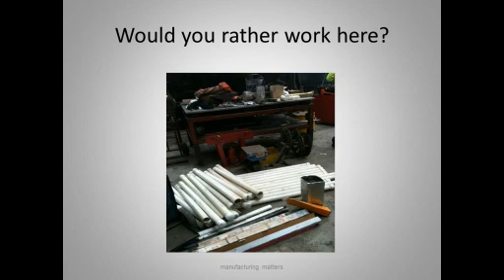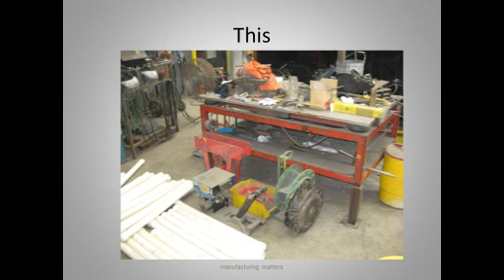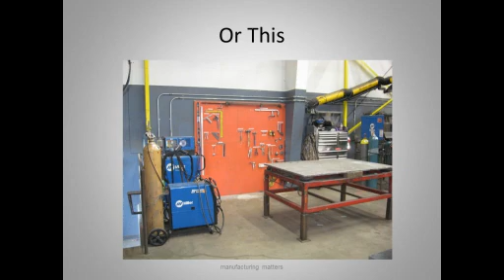So let's look at some quick photographs. Would you rather work in a place like this? Would you rather work here, or would you rather work here? And again, would you rather work this kind of spot, or would you rather work here? Now these pictures were all taken at Madden Fabrication here in Portland, and they're not suggested to be before and after pictures as much as they're pictures during the 5S event that we did there a few weeks ago, a couple of months ago.

By the way, the 5S stuff is not just about the shop floor. For those of you that have a nice cushy office, tend to think, well, this 5S and this lean stuff is all about organizing the shop floor, guys, it's got nothing to do with me. Not true. You're not off the hook. You can apply these techniques and 5S stuff to your office environment too, and we'll see how to do that.

Okay, let's look at some definitions of 5S, what it means. I've got a couple of definitions here. So 5S is a way of organizing the workplace so that everything has a place. Everything has a place. There's a place for everything, and the things are easy to understand. It's about things that are easy to understand, and that's where it leads into this visual stuff.

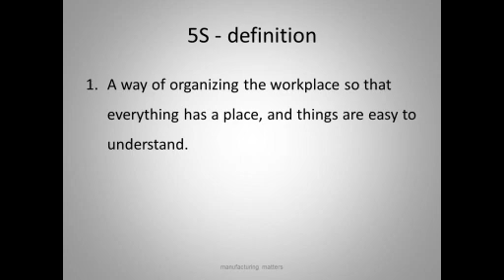Here's another definition: it lays the foundation for a visual, efficient workplace. So not only is it about workplace organization, but it also lays a foundation of these lean techniques. 5S is one of the fundamental foundational ones. You find that a lot of them build on 5S.

You can go as just use 5S and not do anything else if you wish. You could just do workplace organization and leave it at that, if you wish. But if you want to continue further, then 5S is a foundation, sort of a bit of a discipline that the other lean tools build on.

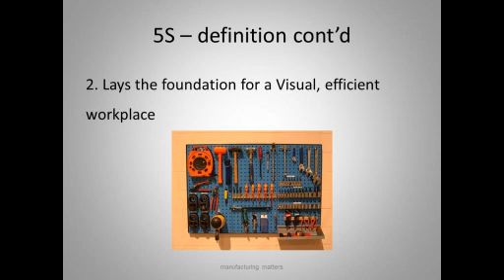Here's the easy definition, the only one you really need to remember: it's a place for everything and everything in its place, at its most fundamental form. That's the bumper sticker definition, and it's the way most of us were brought up as kids. You know, it's go clean your room, it looks like a pigsty.

The little whack on the head here is the second statement: you should be able to find anything within 5 seconds. Think about that. It's pretty obvious that if I've got a shadow board alongside my work area on the shop floor, I can put my most frequently used hand tools there.

But what if I'm in the office? What if somebody calls in and wants to know the progress of their job, and you can't say, well, Martha's on vacation or off sick today, but she might be in tomorrow, she'll get back with you then? You need to be able to find information within 5 seconds too.

So whether it's in a file cabinet or in a computer, those things can be organized in the same way, using the same kind of discipline and techniques.

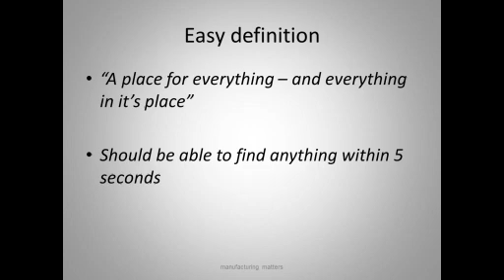What is 5S? It's actually in the lean world from 5 Japanese words you don't need to memorize, but they were translated into 5 English-American words: sort, set in place, shine, standardize, and sustain. We're going to go through each of those in detail.

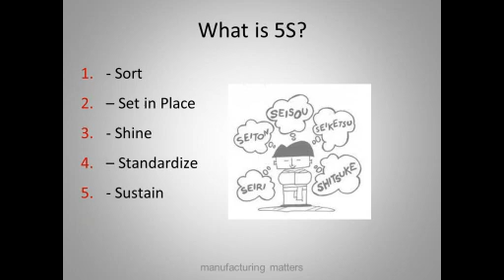Again, it's not just a linear thing where we go through those steps and we're done. Think of it as a philosophy of continuous improvement. We're never really finished. And the most difficult of these elements is the sustain part.

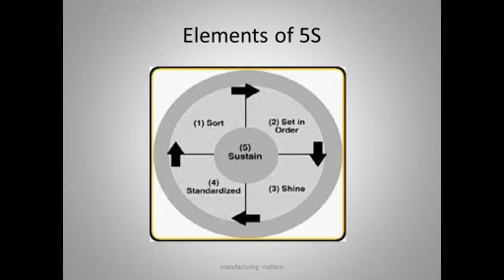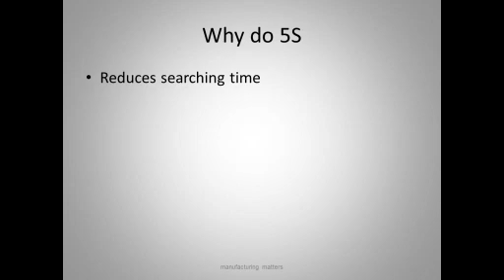Why do 5S? It reduces searching time. You're not going on search missions looking for tools, who's got my screwdriver, who's got my wrench. So it reduces searching time on the floor, reduces frustration.

It also enhances safety. A more organized and cleaner place is a safer place to work. You're not tripping over stuff.

Improves morale? Yeah, working in a messy shop is bad enough if it's your own mess. But if it's somebody else's, it's really demoralizing.

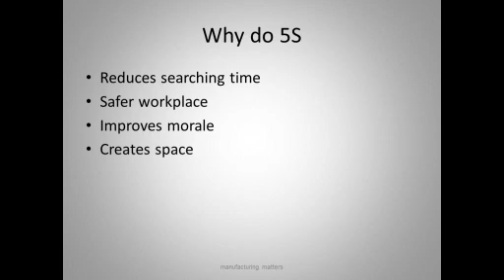Create space? Yes, I've worked with people in the past whose original reason for engagement was they wanted to move to a new facility, spend a couple million dollars because they were running out of space. When we looked at how they were using their space and did some 5S and improvements in process flow and layout, they had plenty of space. So it saved people some money there.

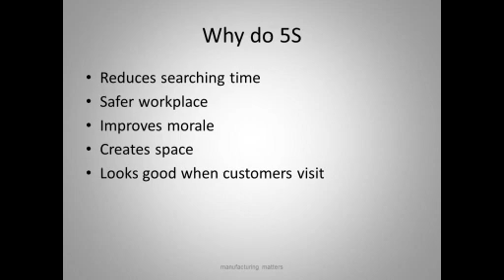And last but very much not least, it looks good when customers visit. You should feel proud of your shop, and when customers visit it can be a bit of a showplace. This place is well organized, these guys have got their act together, and I'm going to give them work based on that. And that happens.

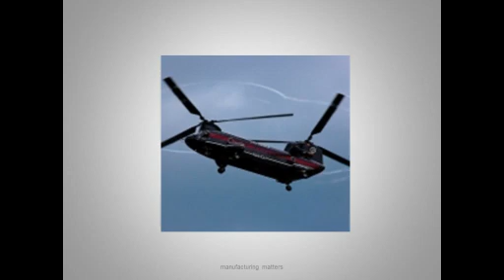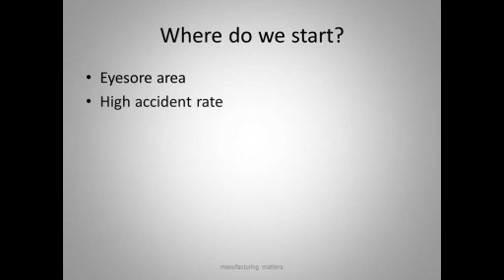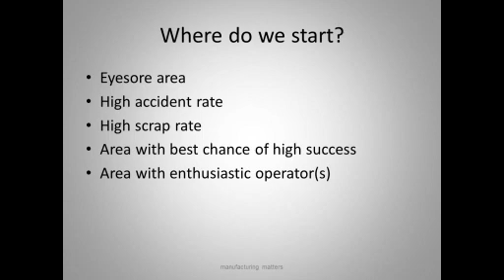So where do we start? Well, you can start with an eyesore area, the obvious eyesore area. I like to start with the two at the bottom here: pick an area, pick on some low-hanging fruit, pick an area with the best chance of success, and an area with enthusiastic operators. The operators, the people in that area, the shop floor guys, are the ones you'll be working with doing the actual 5S, and they need to be enthusiastic about it, otherwise it won't work.

So going through the elements of 5S in detail, the first one is sort. Define the area that we're going to 5S. We need to really delineate it, because we need to define what is in this area and what's not. Don't bite off too big a chunk at first, because you'll find this sort area might be more time consuming than you originally planned. Maybe you should tape it off, maybe put some chalk lines on the floor, but define exactly what's in this area and what isn't.

First thing we do is remove all the items from this area, and we put them into 3 piles. Basically, and this is fundamental, we put things into 3 piles. So we take all the stuff out of an area, put it into 3 piles on the floor.

There are things that we use every day. There are things we use occasionally or infrequently when we do that particular job for that particular client, like this fixture, this gauge, this particular tool. Then there's a third category: I've worked on this bench for 3 years, this stuff's been under my bench, I don't know what it is. That third category is stuff we basically don't use.

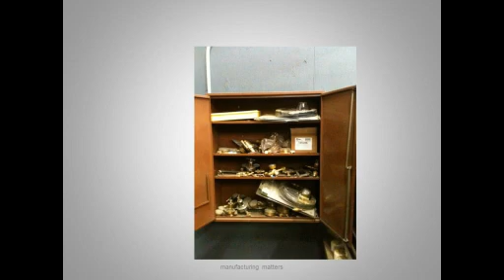Here we have, open the cupboard, I wonder what's in here. And it turns out to be a bunch of pressure gauges for welding tanks. We're going to go through this stuff, we've got to decide which ones are still usable and separate them.

So, no use going through a 5S area and then discover all this stuff in the cupboard in the middle of the area that you forgot about.

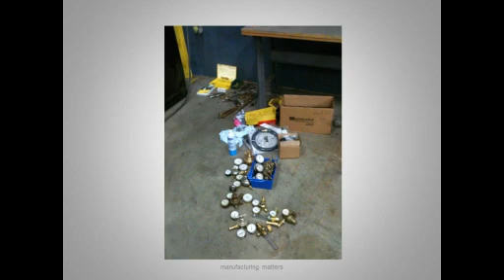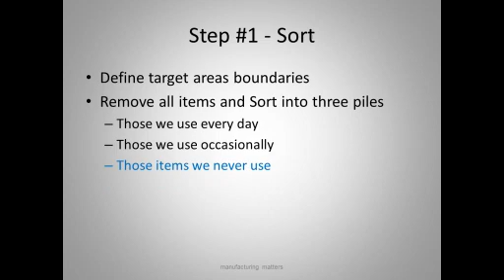So the third category, those items that we never use, we're going to take those and put them in a special area. Think of this area as a quarantine area. In the lean world, it's usually described as a red tag area, and we'll see why.

The red tag area is a designated area for these 'not sure what they are' items. Large shops tend to tie a red tag to each item in that area, cordon off the area, and call it a red tag area, and it's quarantined. We don't want these items creeping back into production.

This red tag area is set aside, off in a corner someplace. Then company management and a historian go through it. By a historian, all your shops have these people, a guy or a gal that's been there a long time, knows everything, and they go through the area and say, oh hey, I've been looking for that piece.

We wondered where that tool had got to. Or they decide this is usable, this is fixable, or this is something we need to get rid of or put on eBay. So that's what the red tag area is for.

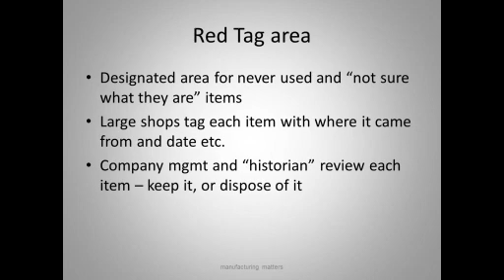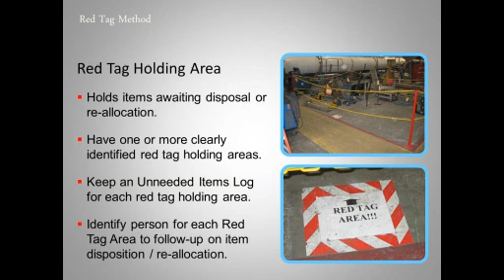The items that are tagged, the reason for tagging them is we put a date on there, a description of the item, what we think it is, where we found it, and the reason for red tagging it, like we don't use it anymore or we think it needs fixing.

The reason for the date is because one of our ground rules is we're going to set up this red tag area in a corner of the shop and put a date on everything, and if nobody's claimed an item or found a use for it within, let's say, 3 months, we're going to get rid of it. Otherwise things will languish in this area forever.

So this red tag area might be part of an ongoing process as you 5S different areas of the shop.

I had a bad cold last week and I'm still getting my voice back, so occasionally I'm stopping for a sip of some tea.

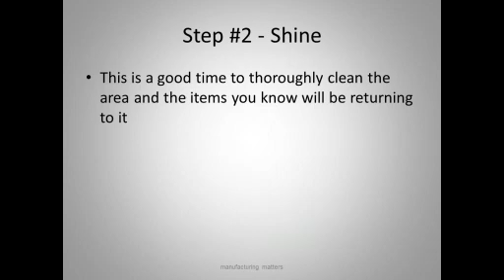So we've done our red tag stuff. The second part of the 5S elements is shine. We've taken all the clutter out of an area. What we now want to do is give it a good thorough cleaning. We want to clean the area, and we want to clean those items that are going back in there, that we know are returning to the area.

There's another aspect of shine that's fundamental and important. Shine is not just about cleaning, shine is also inspecting. So when we're cleaning an item, we're looking for leaky hoses or frayed cords, things that would be a downtime issue in the future that we can fix right now, things that could be a safety hazard that we can fix right now. Cleaning is inspection.

It's not just cleaning. And before we put items back into an area, machine tools and equipment, how about a fresh coat of paint? That really picks up the morale.

It turned out to be a great little success story. When we set it up and moved it into its own area, probably about half a dozen employees, it had enough work to keep them busy a shift and a half. They decided to steam clean all the equipment as they were moving it and give it a fresh coat of paint. I was in there a few months ago taking some of these pictures, and the place looks even better than it did when I last was there. So it's great.

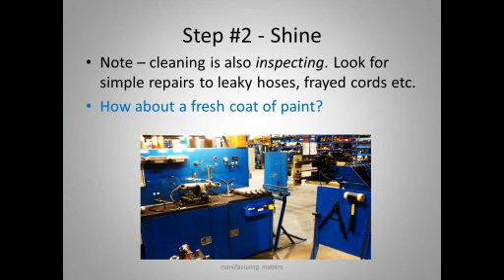And you can see things, there's nothing out of place there. They've got shadow boards and things marked where they use them.

So we've sorted out all the items. We've done step one, we've got our red tag area. We've cleaned the area, we've cleaned the items, we've brought them back in. We need to set things in place, and we need to use common sense locations where things go.

Within the area itself, we should use shadow boards, labels, color coding. Keep items off the floor, and the goal is to find everything within 5 seconds.

Keep items off the floor. That's hard to do, but it really is. If you can do it, I would really encourage that. It's hard to keep a place clean if you've got a lot of things on the floor. It's best to put them on shelves, low shelves and stuff, or equipment you can wheel out of the way so you can clean around it, because we want to keep the place clean.

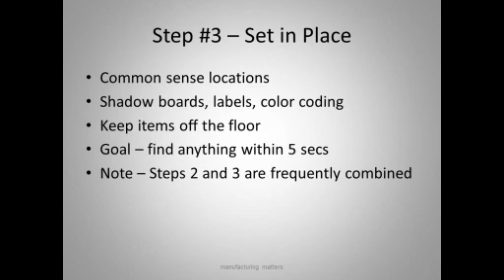Set in place. Items go, here's that picture again, items go on a shadow board, frequently used stuff, hand tools and such within easy reach of the fabricator, the welder, the operator.

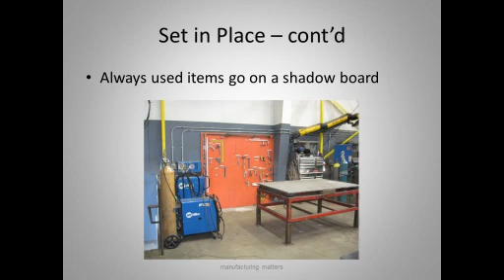And items that we use occasionally when we do particular jobs, we want to put those in a visible spot, call it a tool room or on a shelf. Again, these are marked, we're in the process of doing that here. We put a profile around them so we know not only where things go, but when they're missing.

And these items need to be clearly labeled and in good working condition. We don't want to go to the tool room to grab a hand drill or drill motor or whatever and find it doesn't work.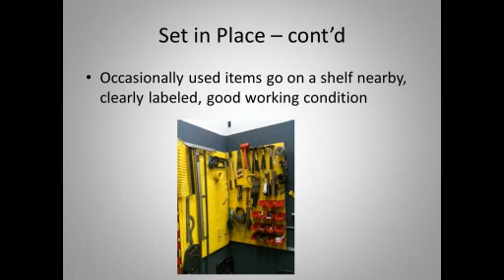So you're looking at this stuff, but you're thinking, well, this is costing me a fortune, what's it saving me? We're always looking at the bottom line. But I'm suggesting that this stuff doesn't need to be expensive. Fabrication shops typically have a bit of feast and famine, there's some downtime. Yeah, you're paying people to clean this area, but they're on the payroll anyway.

So schedule your 5S in an area around some downtime, and don't spend a bunch of money on these shadow boards. We're not building them out of steel. I like to lay them out on cardboard on the shop floor at first, then buy some pegboard and freshly coat it, paint around it, because whatever we put on shadow boards, whether it's in the stock room or especially in the area, it's going to change within a month or two.

People are going to say, you put this set of wrenches up here, I don't use all these. So it's an ongoing process. It doesn't have to be expensive. I want to show you a really creative example here.

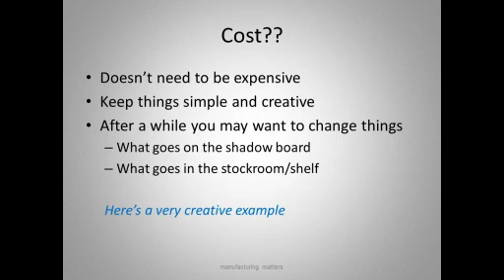Here's back in our helicopter maintenance organization. I walked in here one week and they're all excited to show me what they've done with 5S in their hangar operations. The hangar operation is a shop that works on the outer skin of the helicopters. There's various shops, about a dozen. I work mostly with the jet engines. So I walk in there and they're all proud to show me this 5S thing that they wheel out alongside each helicopter as they're working on it. My first thought was, oh my God, this must have cost them a fortune. It didn't.

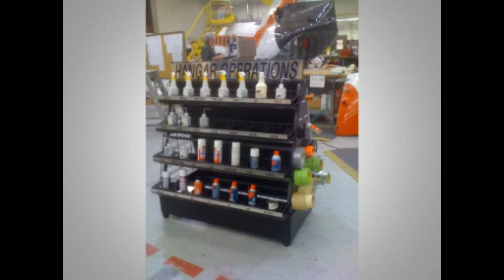There was a company going out of business, Hollywood Video, because nobody rents videos anymore in the store, you download them on Netflix or whatever. So there was a bunch of these shelving units they picked up for practically nothing, and they adapted them really well to hold consumables, fasteners, rivets and stuff that just fit in the slots where the videos used to go. They labeled them, and on the sides they've got tape that they use. Here's a backside picture of their solutions, cleaning solutions and stuff. All this has to be dated because everything in helicopter operations has to be tracked and dated. So this really helped them a lot, and it didn't cost a bunch of money.

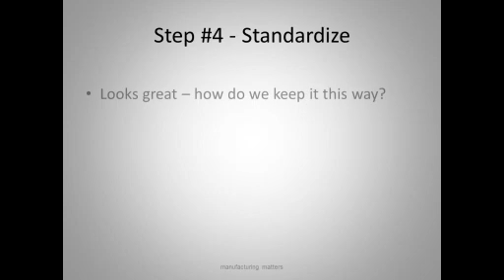Standardize, the fourth step in this lean stuff, is standardize. The place looks great, how do we keep it this way? This is where things start to get hard. Well, we keep it this way by setting some time aside on a daily basis, a weekly basis, and it doesn't have to be much, just 5 minutes at the end of each day to clean up, get the broom out, clean up, and maybe 15 minutes at the end of the week for telling people to keep the area clean and put things back.

We need easy access to cleaning stations. By a cleaning station, think about a shadow board within easy access to your areas with a broom, a dustpan, and some cleaning supplies. Make it easy for people to do the right thing. And then maybe we publish some cleaning standards. Depending on how big the shop is, we may publish cleaning standards with photographs showing this is the way the place used to look, here's the way it now looks. Here's a list of things I want you to do on a daily, weekly basis that you guys should figure out yourselves how to do, but it needs to stay this way.

So standardize is the fourth step, and we call it standardize because we need to set cleaning standards and have them uniform throughout the shop. I have some examples of cleaning standards, and I can make this stuff available through Martha, some of these forms and things if you eventually want them. Here's some cleaning standards that will be posted in the area suggesting what we'd like you to do on a daily, weekly, monthly basis. And if this sounds a bit like preventive maintenance, it sort of is. 5S stuff blends and meshes really well with PM programs.

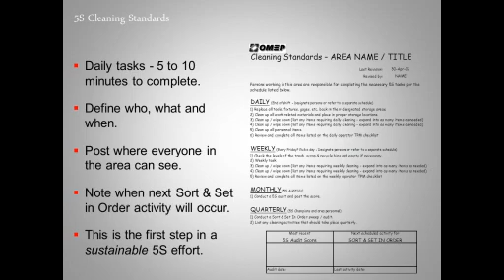Sustaining depends on the size of the shop and how sophisticated you want to get into sustaining things. Basically, what we're talking about here is a fundamental shift in working habits and maybe even company culture. Anyone who's tried to change a habit knows how difficult it is, and 5S can be thought of as changing company habits. So some places want to measure 5S, how we do it on sorting and set in order. Are things clean the way they're supposed to be, the way they used to be? Are things put back the way they used to be? Are we sustaining it? Are our standards still working? And they score it, that's a little diagram there, 5S scoring.

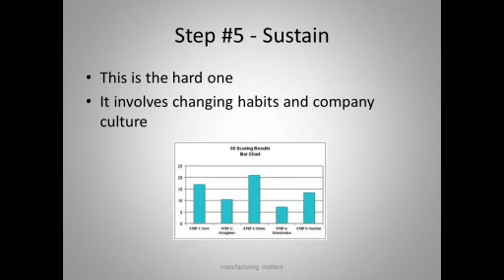So these guys have done a great job of 5S, and as a team they're self-managed in the sense that we set up standards for what we'd like them to measure and track. They measure their own productivity - labor hours per hydraulic cylinder - their own quality, and their own on-time delivery. They work closely with the engineer and the scheduling person, set their own goals, and one of the other things they measure is their own 5S performance.

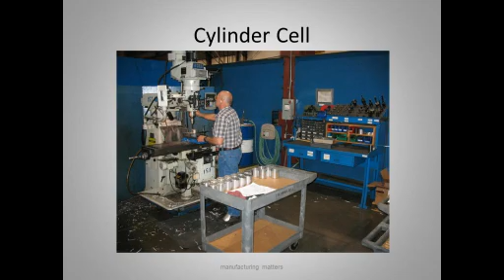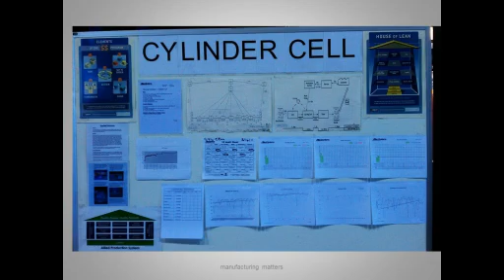Here's a board. When you walk into the cylinder cell, here you can see graphs of productivity, on-time delivery, and first pass yield quality stuff. And in the center is this 5S audit sheet.

On a regular basis - maybe once a week or once a month - they go around and score themselves: how well are we doing, where's our 5S score? Here they've given themselves a score of 4.5 out of a possible 5, which I think is realistic, and by the way that's a high score. Most shops doing 5S would score around 3. It's a pretty high standard, but it's all part of the self-managing continuous improvement process.

So they're a good showcase, and I occasionally refer people to go see what you can do with this 5S stuff. Here's a good example.

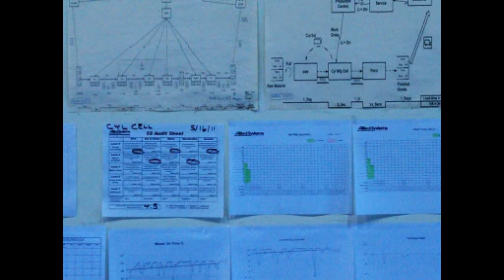We're changing habits, and we want to prevent items from creeping back - things getting dirty, nobody cleaning up, items left in the aisles, or we've got these 5S activities and standards but haven't completed them, don't do them on schedule. This is not unusual - it's common to find places slipping back a couple of times before they really embrace it and move on. So you don't beat yourself up too much on this stuff; just recognize that changing habits can be difficult.

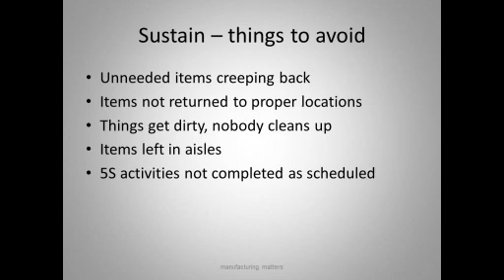Things to do, though, to avoid slipping back: train all employees in 5S. It's not complicated from a training point of view - pretty simple. Conduct regular 5S audits. The audits can be simple - if it's a small shop, it can be a simple walkabout where the boss, the foreman, the works manager, whatever title.

Whatever you illustrate as being important to you, people will know that and follow it. On a regular basis, when you're out in the shop, if you're talking about the place getting kind of tacky again - tools not being put back, things getting dirty again - people will follow that. So the audit could be a simple walkabout, or a formal scoring mechanism. Find a place that fits your style and company culture, but stress the importance - it's like safety - stress the importance of 5S in all employee communication.

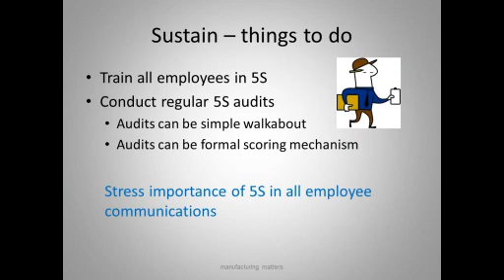So getting started. Select an area with best chance for success. Pick a team, pick a bunch of victims. Must include the operators. And it would be nice if people out of the office came out and rolled their sleeves up and dived in too.

Train the team. That's not a big deal. Do some prior planning. What kind of stuff do we need? Well, we need some cleaning rags and some floor tape, and we need a labeler. We need some pens and scissors, and we take some pictures, some pictures that we're going to use for before pictures.

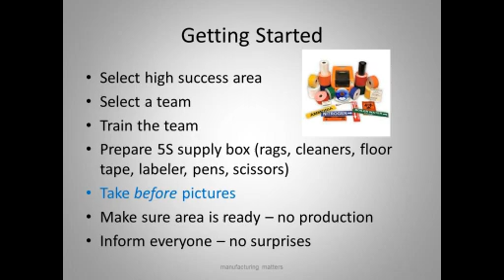And then the obvious one here is make sure the area is ready. We don't want to walk out there one day, a bunch of people walk out there and, hey, we can't do a 5S, we've got this big production job we need to get out. So no surprises. Inform everybody: this is what we're doing tomorrow and for the next 2 days or something. No surprises.

Ensure success. We need to build on success. We need to congratulate people when it's done. Take some after pictures, so we've got before and after pictures, and we're going to post those in the area.

We're going to determine regular cleaning standards, determine those with the people in the area. Don't impose them. It's sort of like, how do we keep it this way? Let's make some notes and then we'll publish them. And maybe we do that in cahoots with maintenance people too.

Conduct regular audits, and then build on the success. This one area was successful. It looks great. People come in and compliment it. Let's continue this momentum going and build on success and do other areas in the shop too.

And then don't forget 5S in the office.

Okay. So we have time to go beyond 5S. Are there any questions thus far?

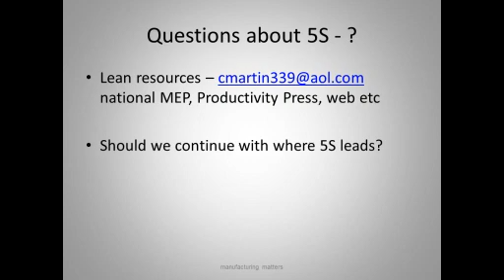Yeah, let's go beyond 5S and see where it leads. I want to go into a little bit of a tickler for an article that's coming up in your next Fabricator magazine. So 5S leads to a topic called visual controls, or visual manufacturing, or the visual factory, or whatever.

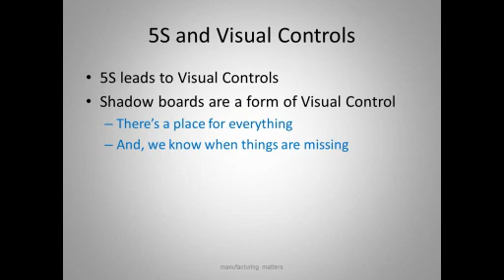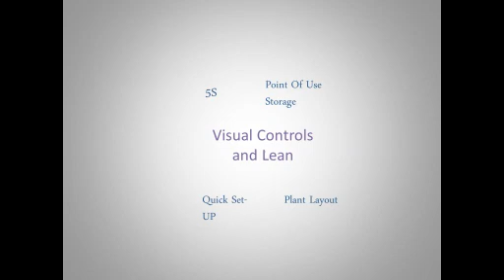We want to make things as visual as possible, because that's where most people learn, and that's especially true in a multicultural, multi-language environment.

So here's visual controls in 5S. Here's a simple 5S shadow board alongside some machine tool. And the person here, the operator, has chosen to paint theirs yellow. Now, why have they painted it yellow? Because one of the first things you do in an area when you set up a shadow board is

it makes it really easy for you to find your tools. It also makes it pretty easy for other people to find them too. So it's not unusual to find people swiping your stuff off your shadow board. The obvious solution to that is when we find the tools or replace them, I'll paint my tools yellow. The next cell can paint theirs red and green and chartreuse or whatever. Keeps things in their area.

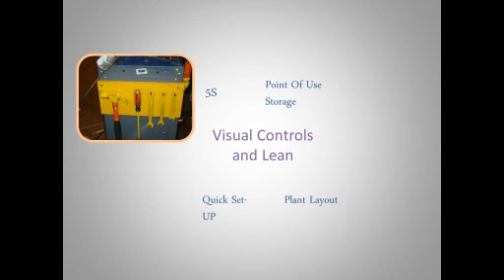Point of use storage. Here's a technique that a colleague of mine took in a mattress factory, a furniture mattress factory, whereas it used to be the saw guy would get his cut list, his production control cut list from the computer, and then the mattress assembly guys would be, there was always this discussion because things would get out of kilter. So it's solved in this physical way, and we don't need the computer telling you what to cut next. We've got the line of all these different pieces of wood for different size mattresses, and behind each one is

the simple green, yellow, and red traffic lights. The assembly people come over and take the pieces they need, and I, as the saw operator, look and see how the level's going down. And when it gets down into the yellow, and especially when it gets down close to the red, that's my signal to make another batch of those sticks and fill it up into the green. More on that later. But that's a great one. It's foolproof. It's a lot better than, what would you rather believe, the computer system or what's obvious?

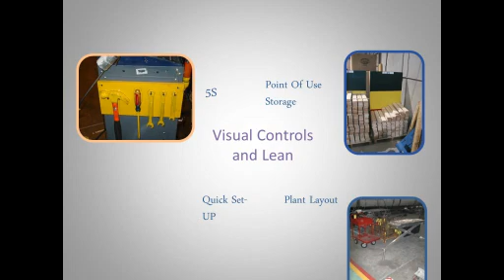Plant layout, visual controls, delineating what's an aisle, what's manufacturing place, what's a red tag area, and quick setup. When we use visual controls, this is maybe a punch press, and when we put the yellow die in, we use the yellow bolts for clamping. The red die takes the red bolts. Dead simple, dead obvious, but saves a lot of time and frustration sorting through a bag of bolts.

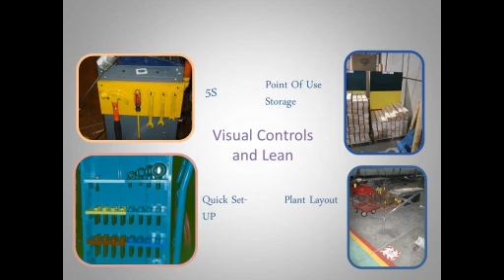We use visual controls in everyday life. We use them, we take them for granted, we don't even think about them. The most obvious, of course, is the traffic light. Green means keep going, everything's fine. Amber, yellow means caution, we need to do something. Red is a warning, we're going to be out of parts pretty soon. So we can adapt this almost universal traffic lights idea and apply it to the shop floor as a visual control, shop floor office.

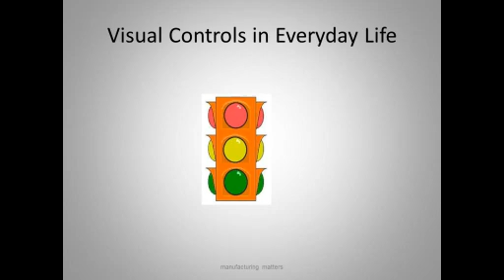Here's a great picture I found. This is a brilliant picture of a visual control. If you hit this sign, you'll hit the bridge. Rather than paint that your truck or whatever needs to be less than 13.5 feet high or something, I hope you carry a tape measure. You don't get any more simple and more obvious and more visual than this. You hit the sign, you'll hit the bridge.

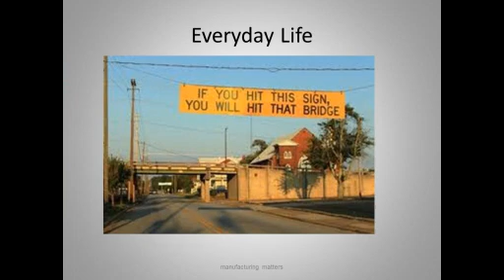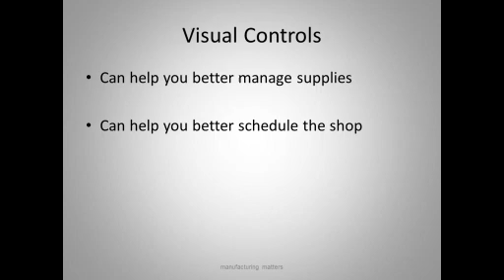So we use visual controls in everyday life, and there's lots of other examples that we can adapt and adopt to our fabrication, our manufacturing environment. Visual controls can help better manage your supplies, whether they're shop floor supplies, consumables, or office supplies, and they can help schedule your shop. We'll show a couple of examples here of stuff we're in the process of doing with Madden. So here's use of a thing called Kanban cards, and Kanban is a Japanese word for signal, and we're going to use these little Kanban cards along with some traffic light ideas for helping us not run out of shop floor supplies.

Can be used for replenishing production parts, as in that mattress factory, where the assembly area pulls product from the supplier upstream manufacturing areas. Again, you can simplify the production control issues by using Kanban cards or by using the traffic light signal. So we can use these for replenishing production parts or for shop and office supplies. Let me show you a quick example.

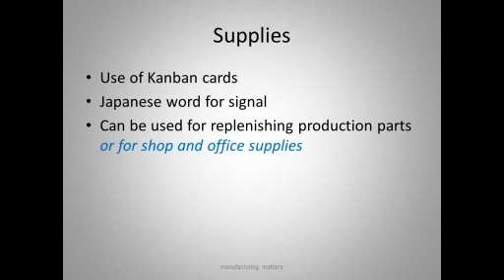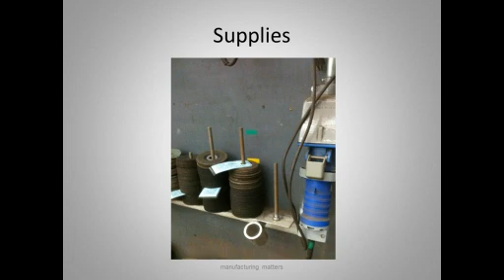Here's a sample of those Kanban cards. There's two cards: a fixed card that goes behind the stack of wheels, which is basically a label, that's on the right here, and we've got it numbered. Then the other Kanban card has a hole in it that slips over the stack of discs, and the hole is also for hanging it on a hook. So we've got a card number, what the part number is, a description of it—it's a 4.5-inch disc, 7/8 hole, 36 grit—and who we're buying it from, our supplier. The lead time is five days. The reorder point is 25.

When we get down to 25 of these discs, we need to pull the card, and that's basically his purchase order. When we get down to 25 discs, we order 50 more. I'll send it out on a priority. Coincidentally, they come in boxes of 25.

So basically, when we get down to the last box level, we order 2 more boxes. It's pretty simple. Greg has chosen to put the price on here, so we remind people these things aren't free. Those wheels are pretty expensive, $7 a piece, so it's pretty obvious to people tracking the cost of the items.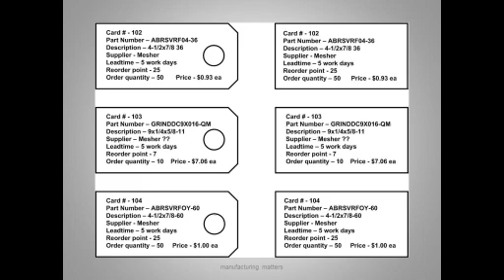So we pull the card. It's hanging on a hook. We're continuing to use these discs. When we get down into the red area, we start to get nervous, and we hope the guy shows up pretty soon. Or if we're really nervous, we'll be making a panic phone call. But anyway, basically it's self-managing, and it works.

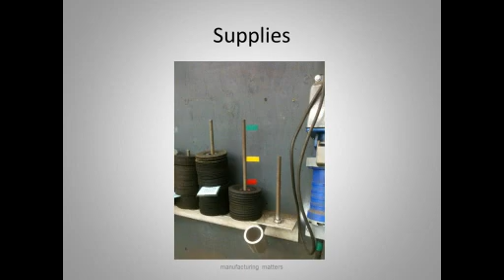Here's a big picture looking back. Here's a line of grinding wheels, grinding discs, and you can see the fixed label behind each one, and the Kanban card halfway down. There's the green stripe, and the Kanban card lines up behind it on the yellow stripe, and off in the center left here is a little diagram of how the system works, and I can show you that briefly.

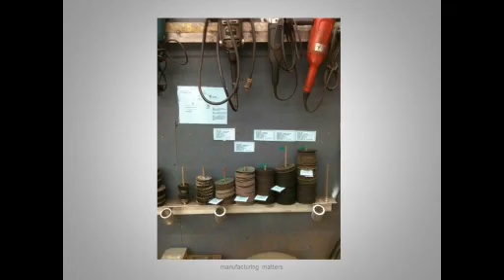So the welder comes up to the grinding wheel rack, takes the last grinding wheel, or takes the one down on the Kanban card, takes the card and hangs it on the reorder post just off to his right. Again, make it easy to do that. We don't have to walk into the office and tell anybody. We just take that card and hang it on the right. That's the reorder post, and we've painted it red.

The supplier comes in and looks at those, and basically those are his purchase orders. He converts them to a purchase order, and then he takes those same cards and hangs them on the green post right alongside the red one that tells people, yeah, those are on order. Two days later or whatever, he comes in with the replacement parts, takes the cards off the green post, and puts them back with the new discs and wheels back where they belong, alongside the yellow reorder stripe, and the cycle starts again.

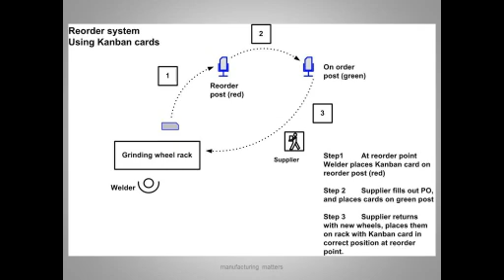Visual scheduling. So we can think about a visual way of helping. Not only do we avoid running out of shop supplies, shop consumables, which is a pain, but also we don't want people running out of work or jobs stopping halfway through the day for various reasons.

So what we've started doing at Madden is there's a brief meeting, a toolbox meeting, 5-10 minutes at the start of each day in front of a schedule board, which I'll show you a picture of in a second. Everyone knows at a glance who's working on which job and can speak up as to whether they need any help or not, whether they're getting behind or whether they might think they need some help. The idea is to reduce surprises here, so that the jobs ship on time, complete on time.

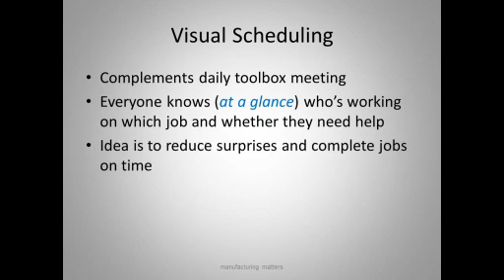So here's a snapshot of the visual schedule board. Again, the idea is to take stuff out of a computer. There's nothing wrong with computers and stuff, but it's nice to take information out of a computer and make it visible to everybody. So down the left side is a list of all the jobs that are currently in the shop, and then days of the week across the top. These cards are different phases of the same job.

So, for instance, this could be a job that we're going to start on Wednesday. It's going to be in the saw. We're going to cut material. On the next day, we've got enough hours. The second phase is fabricating it, welding it, and the third phase is maybe painting it and shipping it.

So every morning now we can address how's that job doing. Is it going to go on time? Do you have the equipment you need? Do you have the tools that you need? The supplies that you need? And do you need any help?

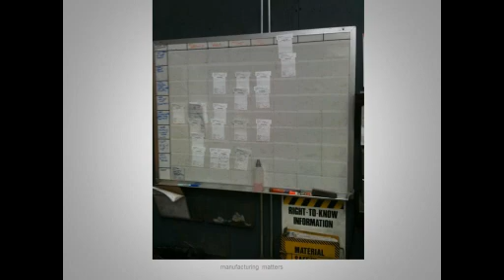So this is the attempt at visual scheduling. Doesn't have to look exactly like this. This is one of those things like shadow boards: you like the idea, you try it in your own place, and you don't spend a bunch of money on this. You lay it out on a whiteboard with dry erase markers, so you can change things around, because it'll change a couple of times. And here's another example of the schedule board.

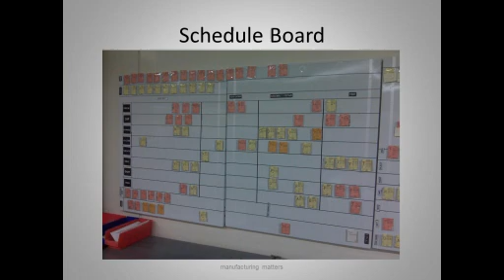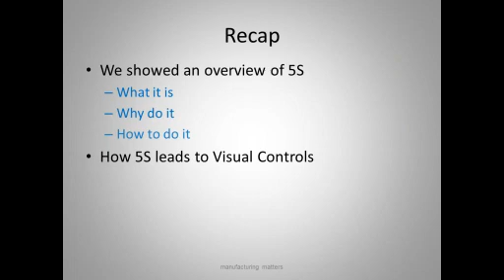Okay, I think we're about done, this is probably my last slide. So as a recap, we've described the overview of 5S, what it is, why do it, and how to do it, and then how 5S leads to visual controls. We've done some brief show and tell on that, and how you can apply visual control techniques to help manage shop supplies or office supplies and help with scheduling on the shop floor.

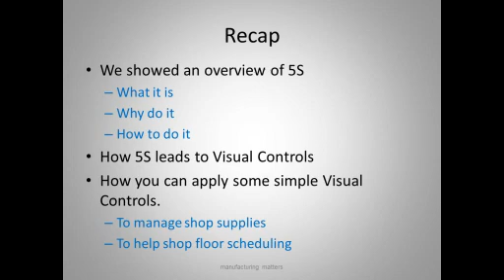So, okay, I am about done. I thought this would take about 45, 50 minutes. Any questions? I hope these techniques are applicable.

I cannot see the chat feature. So you can't? No, I've been locked out for some reason. So Charlie, if you can see chat now, you may see some questions in there. I can't see it, what can I do to see it? There's no way, but if you are on audio, you can ask questions now. Charlie, you must have explained it all. I must have explained it all.

Well, I hope these techniques are applicable to your business environment. I'm interested how I can help further, and I've got a little thing at the end here. Where do you go for more information about lean stuff and how you can apply it to your own unique environment? There's my email address, and I would encourage you to email me questions. I have no problem at all, I'd enjoy getting back with you over email. And if I can't answer it quickly over email, I'll point you in other directions.

For instance, there's a company that's published for 20, 30 years, Productivity Press. They come out with a great line of books, some of them quite thick and nerdy, but there's a series they publish called the Shop Floor series. They're almost thin paperbacks, and you can get them on 5S and setup reduction and all these different topics, and they're great. I've frequently bought those and left them with companies.